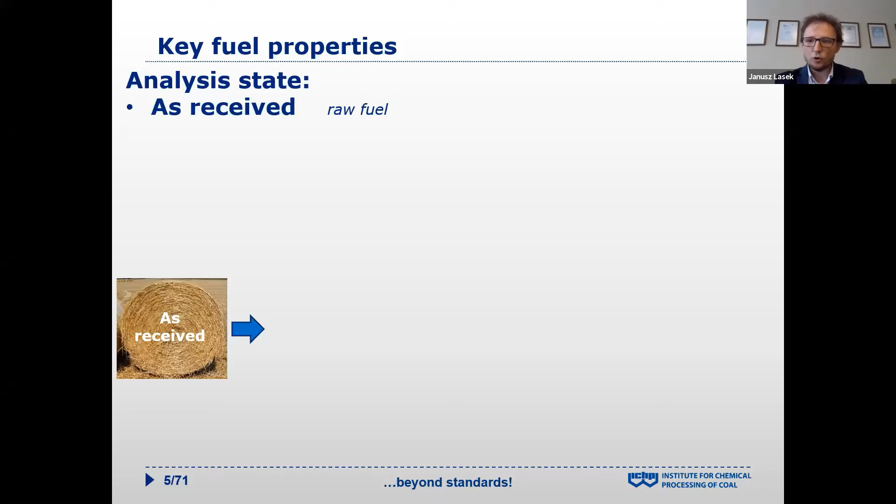First, I would like to mention the analysis state, because every time we present the numbers of fuel parameters, we have to state the analysis state, because the numbers can be shown as received state - meaning we analyze the fuel without any processing, with moisture, with ash. Of course, we can assume the fuel can be dried in air, not in oven, just in air, and take a balance between the moisture in air and moisture in the fuel. We call it dry air, or sometimes in our system we call it

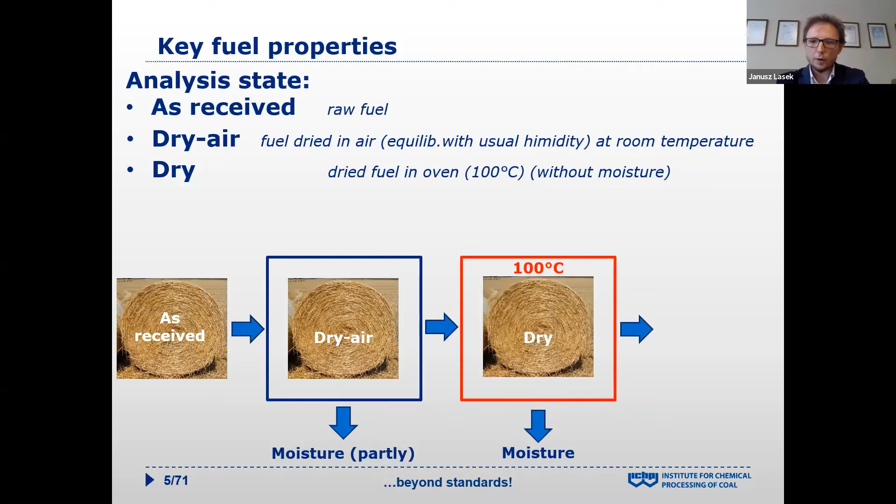analytical state. The next step, if we put the fuel into the oven and dry it and remove all the moisture, we call it a dry state. And if we assume we can also remove the ash, we call it dry ash free state.

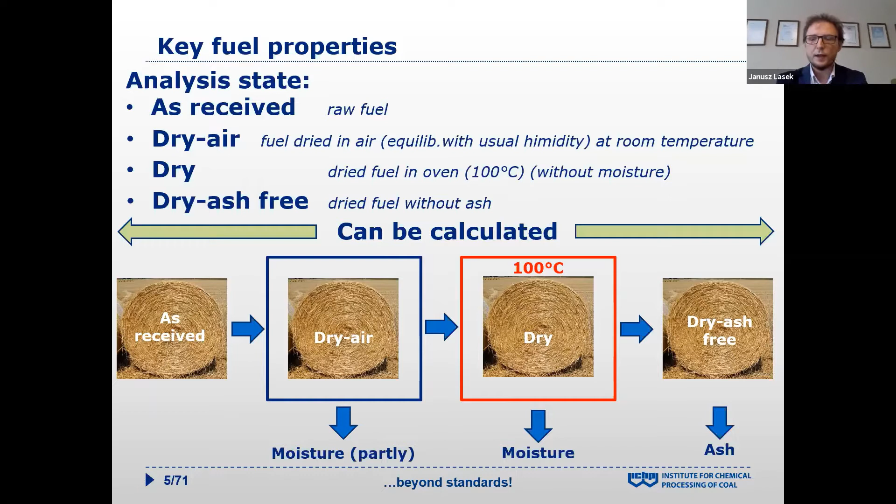Of course, we can calculate very easily from state to state. However, we have to have specific parameters, especially moisture content and ash content, to calculate between as-received and dried. It doesn't matter - we can easily do it if we have specific and well-known parameters.

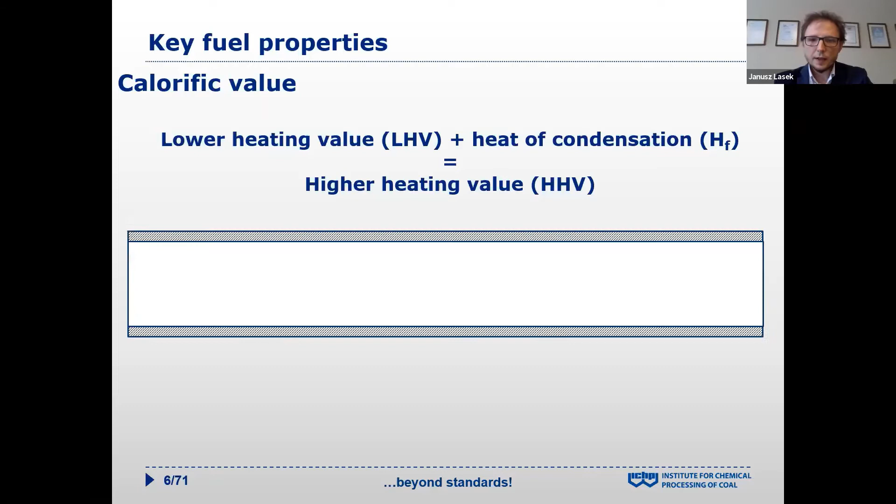The next important thing is, of course, the calorific value, but we can distinguish between lower heating value and higher heating value. The scientific definition looks very easy: lower heating value is the heat if we consider the combustion of the fuel portion, and we cool down the flue gas. We can take the heat and cool it down just below the room temperature. We can say that we take the lower heating value - this is the heat of the lower heating value.

But if we can recover the heat of the water evaporation, we have the higher heating value. Of course, 'higher' means the higher value.

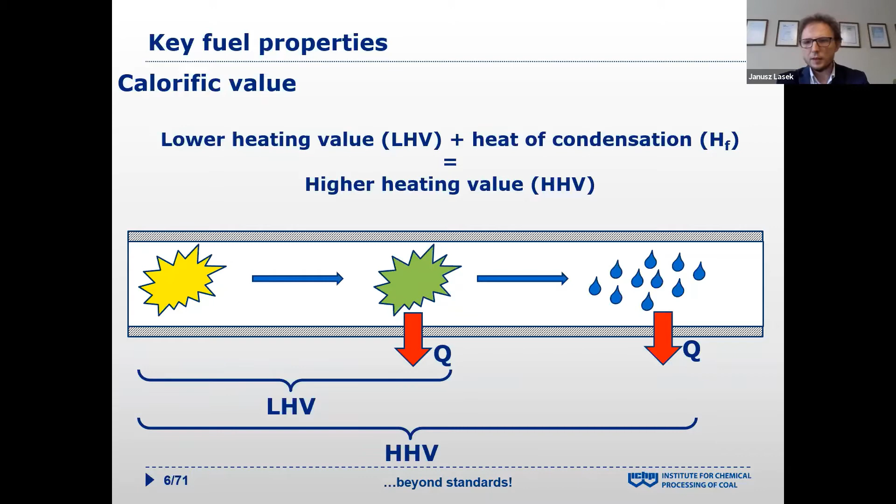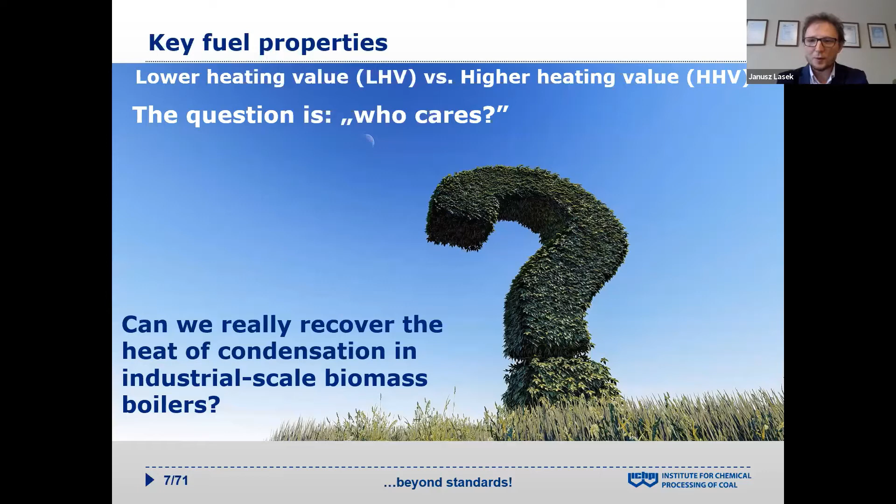However, sometimes engineers ask us, well, is it possible to do this in industrial scale, industrial processes? Maybe it's only on paper or in a book. Of course not - we have an example of an installation in a Polish CHP plant.

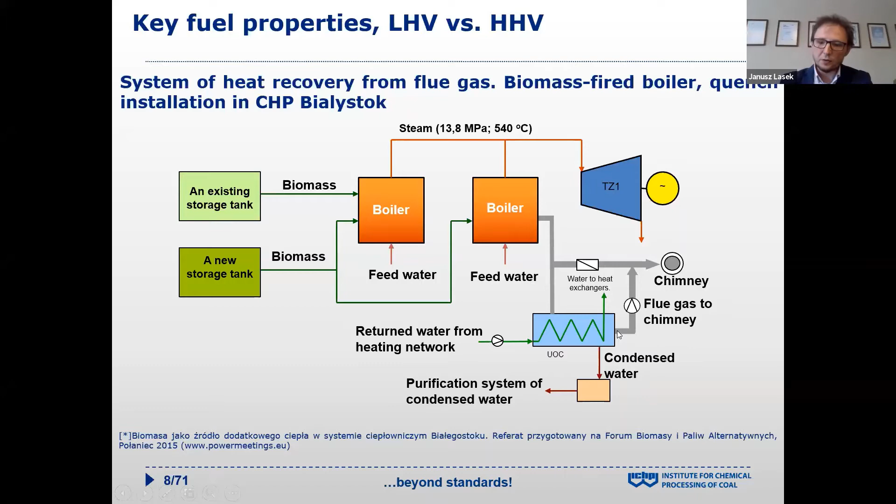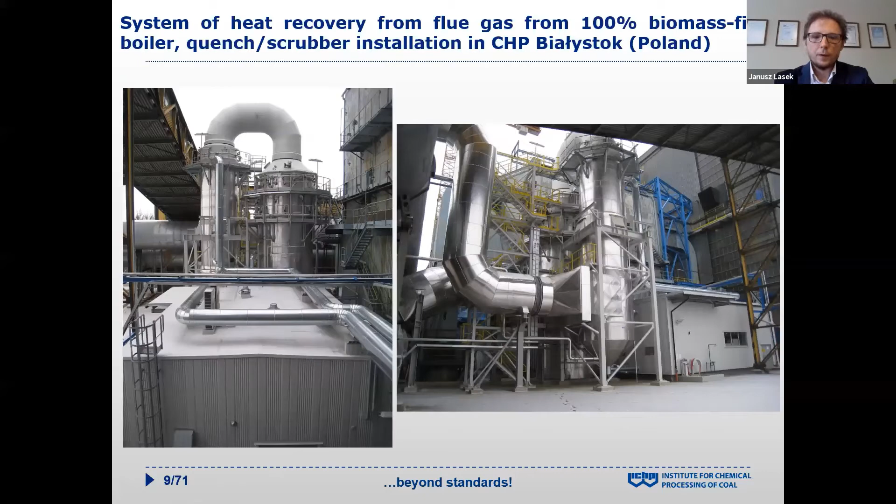You can see here the heart of this system. When the flue gas is quenched, the water vapor is condensed, and as a benefit there's additional heat that we can recover. As I said, this installation is really operated in reality - it works now. So I'd like to confirm that in some solutions, it is possible to recover the latent heat of evaporation in industrial scale installations.

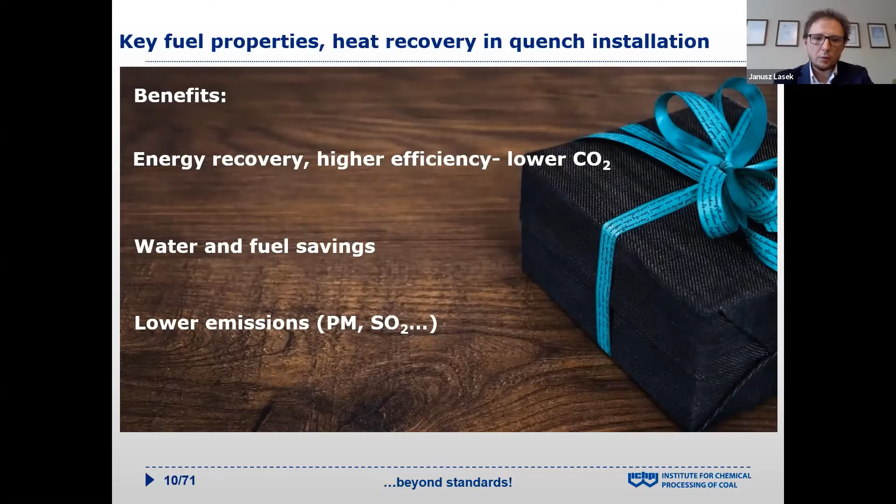Okay, so of course, these solutions have a few benefits. Let me shortly describe them. We recover energy, we have higher efficiency, lower CO2 emissions. We can also obtain lower emissions of particulate matter and sulfur dioxide, because if the particles are wettable, they can be captured in this equipment. The main byproduct is a salt, because a sodium base is used as the main component.

Another very beneficial point is protecting the flue gas pipeline against corrosion by chlorides. This is extremely important for agricultural biomass - if we use agricultural biomass that has usually high chlorine content, it protects the flue gas pipelines.

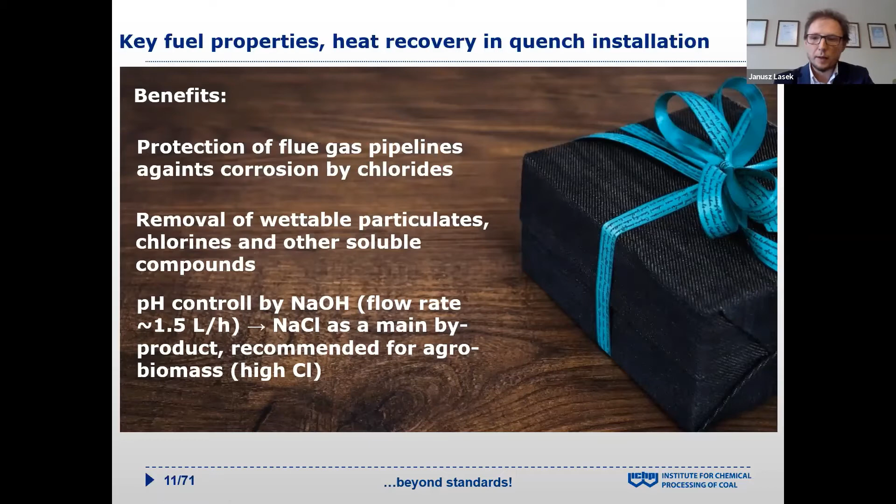Okay, the next important parameters we call proximate analysis. It is the sum of moisture, volatile matter, ash, and fixed carbon. But what does this exactly mean, these specific parameters?

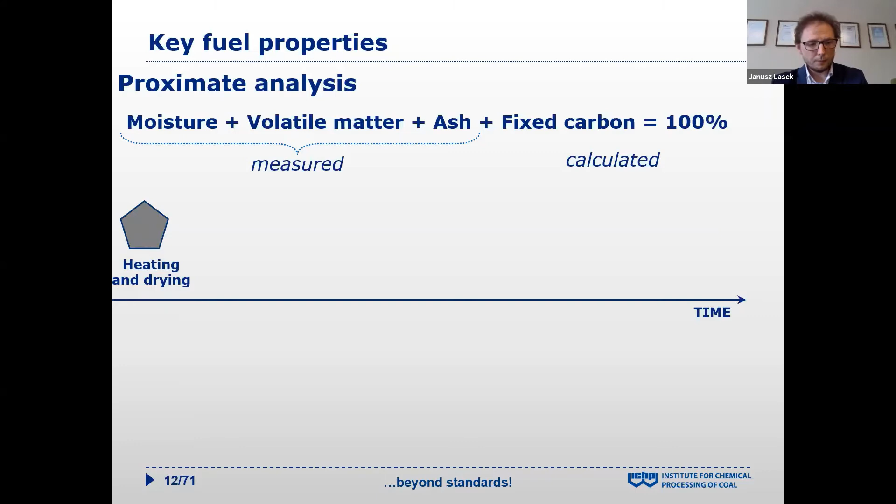Again, let's consider the combustion of the fuel portion, but now we consider only solid fuels, coal or biomass. The first step, if we put the portion of fuel into the combustion chamber, is heating and drying - so we remove the water. It's very obvious. But the next step is release of volatile matter and ignition of that, because the volatiles consist mainly of hydrocarbons, a very flammable mixture. So after ignition, we can observe a quite big flame.

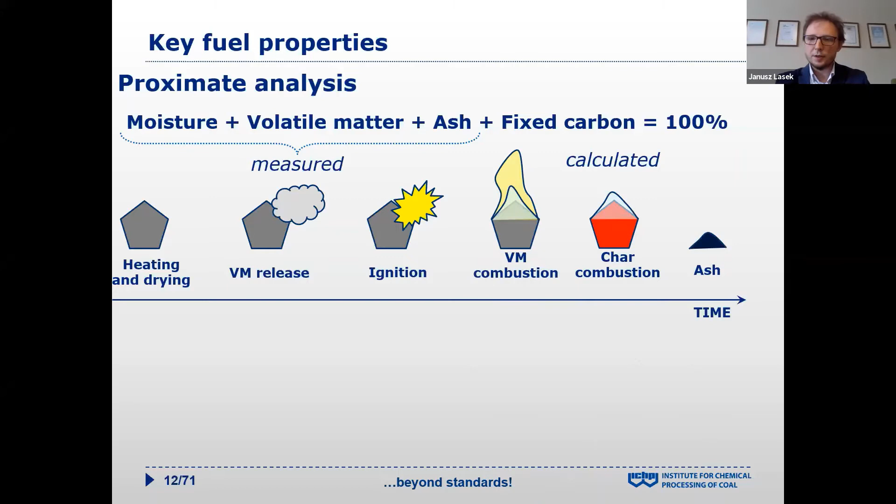And if we use up all the volatile matter, the next step is char combustion. And the final, reasonable step is production or receiving of the ash.

But from a practical point of view, from the power plant engineering point of view, what does each specific component exactly mean? The moisture - the motto is reasonable: more moisture means less energy.

Volatile matter, in our opinion, is a very important, extremely important parameter, sometimes forgotten - in my opinion even more important than calorific value, because more volatile matter means easier ignition, especially for pulverized boilers. If the volatile matter in the coal is too small, even with higher calorific value coal, we have serious problems with combustion control, because less volatile matter means more problems with ignition.

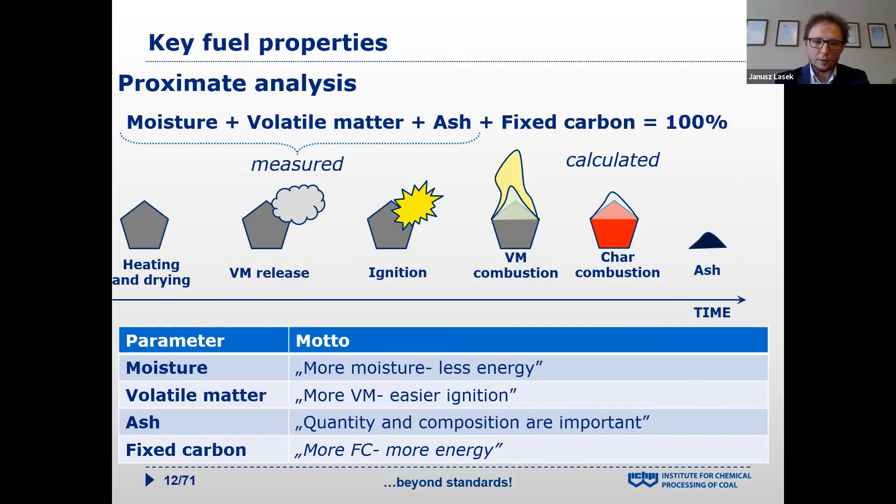The ash - the quantity and composition are important in terms of different processes. Let me say more about that in the next seminar, because the next webinar is about ash-related issues. And the fixed carbon - more fixed carbon means more energy.

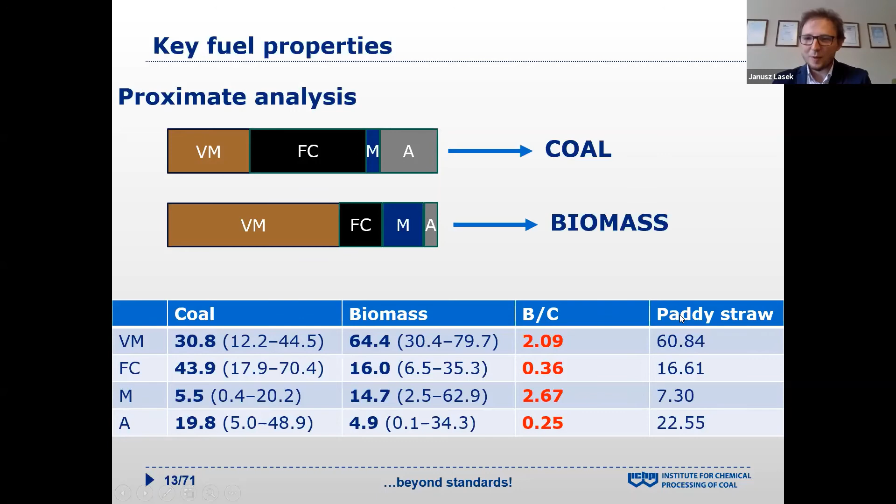What is the main difference between coal and biomass if we consider the proximate analysis? Usually coal has more fixed carbon and less volatile matter, and biomass has more or less 2 times more volatile matter, more or less 3 times less fixed carbon, more moisture, and less ash. But there are exceptions, like paddy straw, which has very high ash content.

Another important key fuel parameter we call ultimate analysis. If we consider the air dry state, it is the sum of carbon, hydrogen, nitrogen, sulfur, oxygen, ash, and moisture. Or if we consider only the dry ash free state, it is a sum of carbon, hydrogen, nitrogen, sulfur, and oxygen.

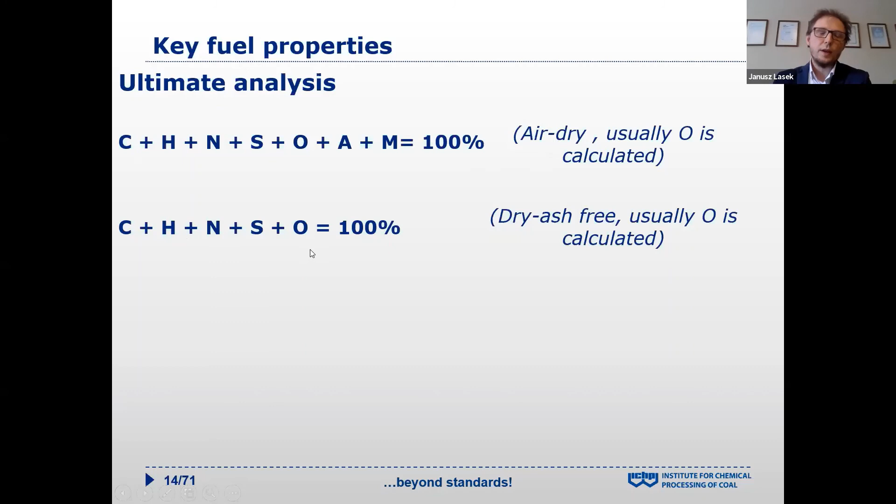And again, the question is, what does this exactly mean in co-firing practice? More carbon and hydrogen means more energy, more nitrogen means more nitrogen oxide emissions (NOx), more sulfur means more sulfur dioxide emission, and more oxygen means less energy.

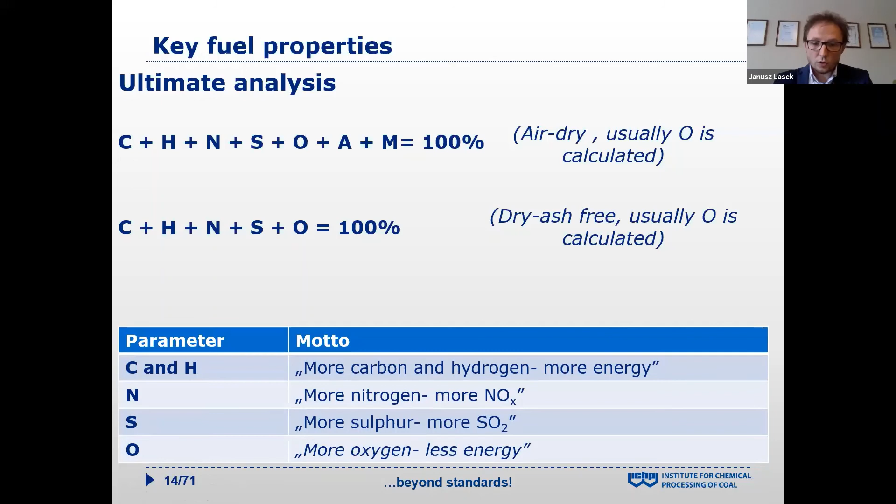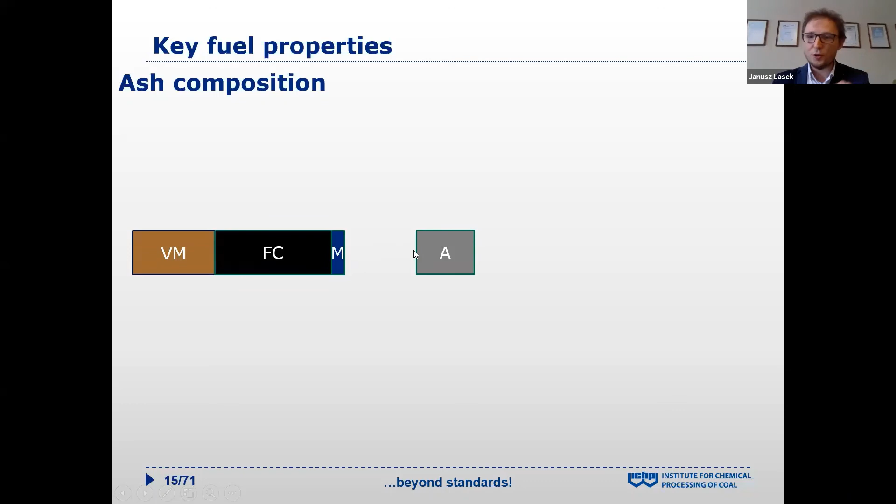The next important point, especially for agro biomass, is the ash composition. So if we consider only analyzing the ash - let's forget about the volatile matter, fixed carbon, and moisture, just analyze the ash - we can analyze many components, but usually there's a list of commonly detected compounds.